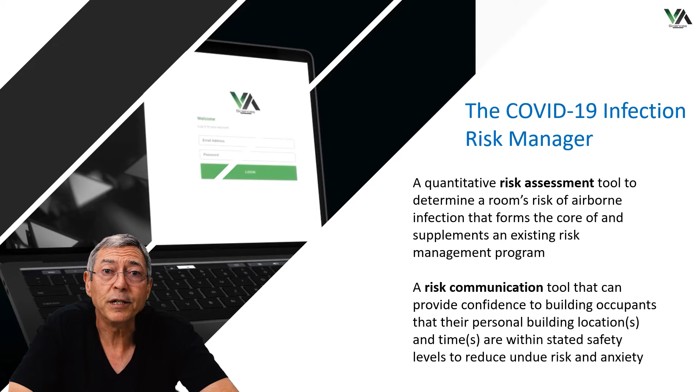Our calculator starts with the problem of reoccupying buildings. So what I present today, our solution, was designed with both scientific principles and risk communication principles in mind, to be used by both scientists and the general public. It is therefore both a risk assessment tool and a risk communication tool.

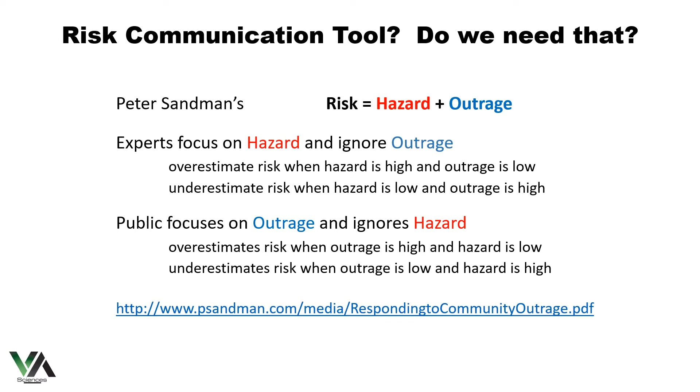Risk communication principles are well beyond the 5 minutes I have today, but consider Dr. Peter Sandman's excellent model, risk equals hazard plus outrage. Put simply, scientists focus on the hazard and ignore the outrage, while the public does the reverse. If we wish to successfully reoccupy buildings, we need to consider public perceptions.

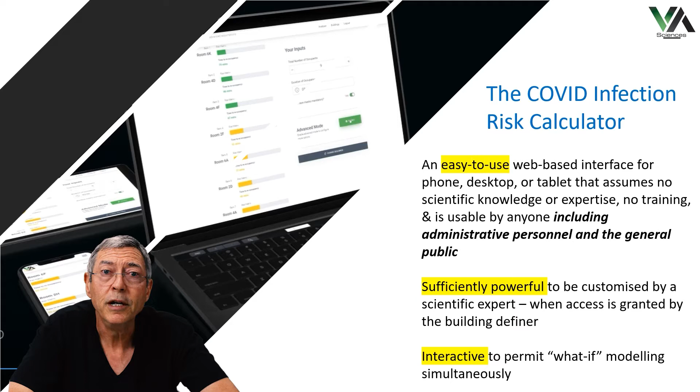The name of our calculator is the COVID Infection Risk Calculator. It's web-based and easy to use, and is usable across all our common devices, including smartphones. With several access levels, a sophisticated user can also create customized templates for others. It's interactive. Input parameters can be changed, and the results seen immediately on the screen.

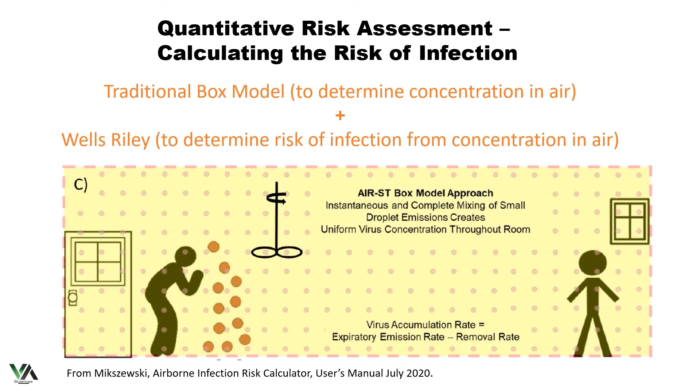It uses the same approach as many others you'll hear about today: the compartment model to determine quanta concentration in air, and then the Wells-Riley to calculate infection risk. It does have some unique features, however, including the ability to compare results across multiple rooms simultaneously in the Compare Rooms mode, and the ability to simulate an individual accessing multiple rooms in multiple buildings or spaces, and then calculating an overall risk, such as what might occur during a visit to an airport or shopping center where you pass through a number of spaces.

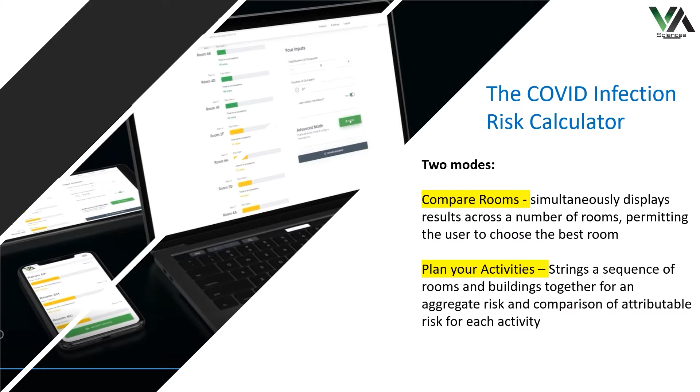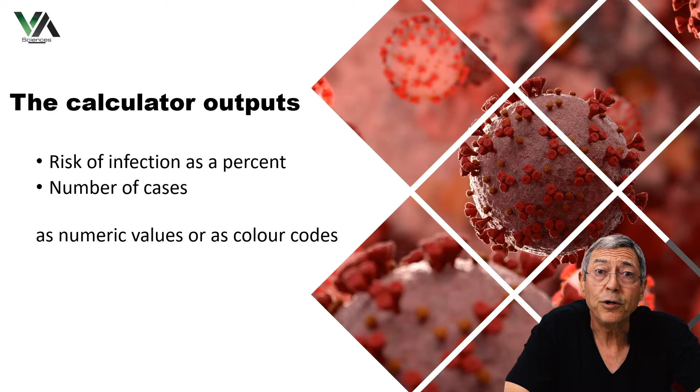It considers building factors, activity factors, and some virus-specific factors, as shown. The output can be controlled as either a simple color code or with more specific infection risk estimates. Let's get started. The solution: a quantitative risk assessment tool that uses the size of the room, the airflow, the occupant activities, and what scientists know about SARS-CoV-2 virus, allowing people to safely reoccupy buildings in a timely manner during the COVID-19 pandemic.

Using the latest algorithms, this tool is powerful enough to provide a scientific estimate of the risk of infection, yet simple enough to be placed in the hands of a building occupant to allow them to understand and manage their risk, reduce their anxiety, and provide the confidence needed to reoccupy their building. In short, this is a risk assessment tool, but also, and most importantly, it's a risk communication and management solution.

A user begins by choosing the number of occupants and the duration spent in the selected building, and immediately sees the risk of infection for all the rooms in ascending order, with the room with the least risk on top. As the number of persons increases, and the time increases, the risk increases, and the changes are shown in real time.

The easy-to-interpret coloured scale bars move from green to yellow to red to indicate the risk. Are masks being used? Toggle the switch to see how this parameter affects the risk level, allowing you and your team to assess and mitigate risk prior to using a space.

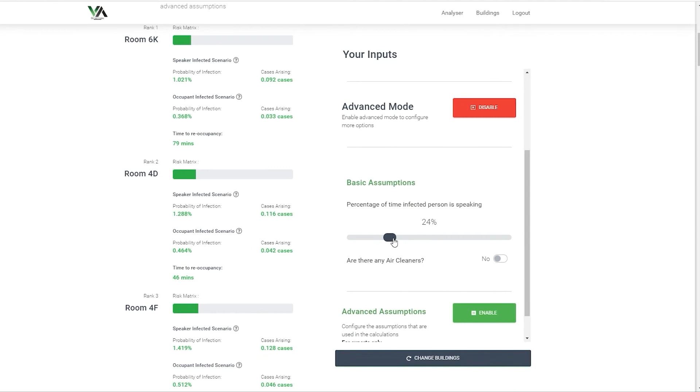Advanced users, when granted access by the building definer, have the ability to modify the underlying assumptions used to calculate the risk. Are air cleaners present? How many and at what capacity?

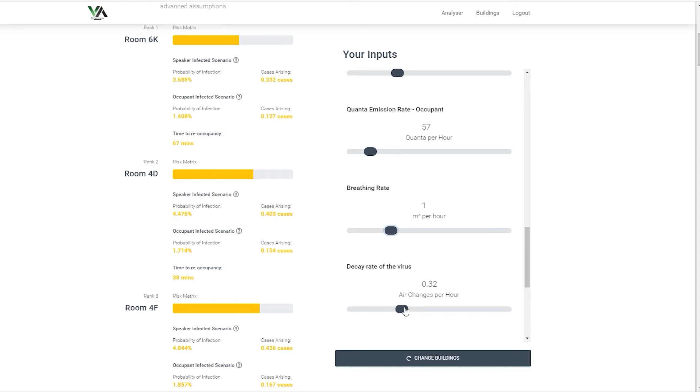Advanced users can display the calculation fields showing the exact numbers used to calculate the results. Changing the default values to reflect any unique aspects of the occupancy makes the tool useful to even the most advanced health scientists. When defining the building and its rooms, the volume and inward airflow, when known, are entered.

Default values for airflow are used when none is specified. After all the rooms are entered, the building definer chooses the bounds for the coloured bands, based on internal policies or on external guidance from public health authorities. These can be changed at any future time, based on changing guidance.

All the building data is stored for future analysis. This flexible web tool operates smoothly on all platforms, so whether you're accessing from your office, your tablet, or from your phone on the go, the data you need will always be at your fingertips.

The VA COVID Calculator is a risk management solution forming the core to your return to workplace strategy. By working with a program that runs on personal devices in real time, building occupants can return to their buildings with confidence in their safety.

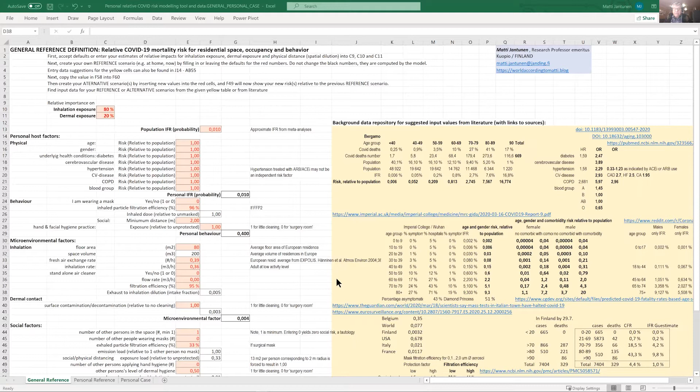This is the first sheet, the general reference sheet. Its inputs now represent European population level conditions in the summer of 2020. In the model, these data produce a reference risk of 5.05 times 10 to the minus 10. This is merely a dimensionless numerical reference that later values are compared to.

The next personal reference sheet represents my own physical, behavioral, microenvironmental, and social factors, plus the average epidemic factors in July 2020 in Finland. My age and gender increase my risk. My blood group reduces it.

My big house and low occupancy, and low national COVID incidence levels, pull the risk downwards, and the resulting personal reference risk estimate turns out to be only 6% of the general European reference risk at the same time.

The third personal case sheet keeps my own personal and microenvironmental factors unchanged, but I changed the social factors here to represent a family reunion, 10 times more people other than myself in the house, spreading viruses in the same volume of air and reducing the distances between us. And the epidemic factor now reflects a 44 times higher COVID incidence in November compared to July.

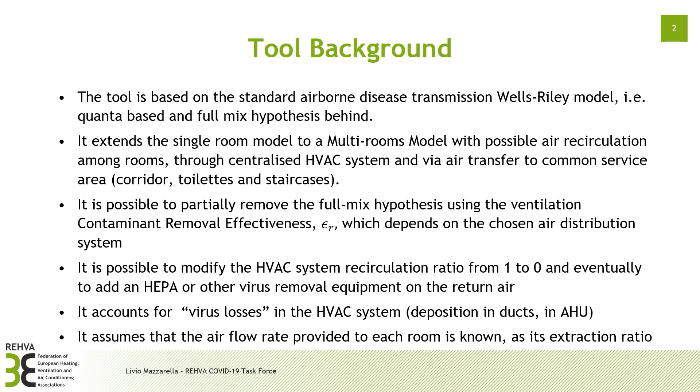Unbalanced air flows in each room can cause air exfiltration or air transfer to corridor and then toilets and staircase, if any extraction takes place there.

Virus sources can be placed in any room, corridor, staircase, and toilet with its specific strength and different time schedule organized with 2 time steps. In addition to HVAC virus filtration efficiency on return air, provided by a HEPA filter or another virus removal equipment, it accounts for facial mask usage through their efficiency, separately for infected and susceptible people.

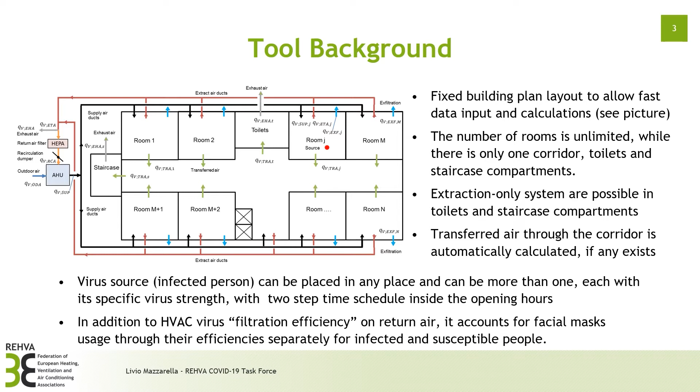In the output, it reports the average virus concentration in quanta for each space, the individual infection risk, and the average number of potentially infected people. Further, the virus air-to-surface deposition is given also for the HVAC system, other than the spaces.

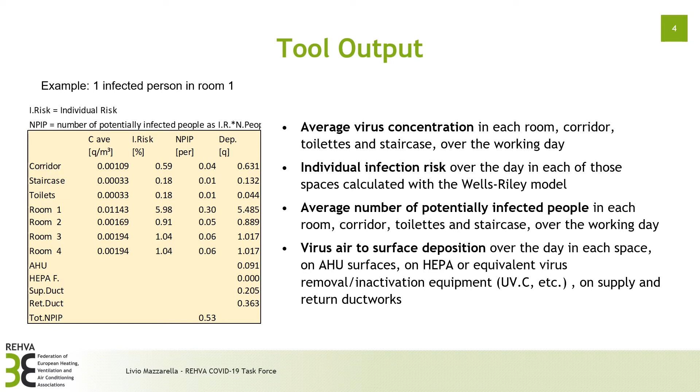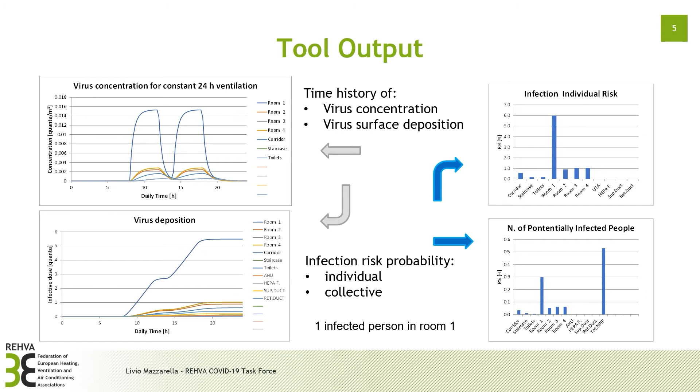Graphic output is also available, providing daily time history for both virus concentration and deposition in each space. Two histograms are available, giving the individual infection risk distribution and number of potentially infected people distribution among spaces in total for the last period. The tool is primarily to be used to perform sensitivity analysis with respect to different possible technical solutions, as shown in this example.

Here you can see how individual infection risk distribution is changing when moving from recirculation to full outdoor air on HVAC return air, just from left to right.

Also, an example of the impact of facial mask wearing is given. The histogram on the left is reporting individual infection risk at 100% recirculation when all people are wearing 50% efficiency facial masks. In the histogram on the right, HVAC recirculation is instead set to 0.

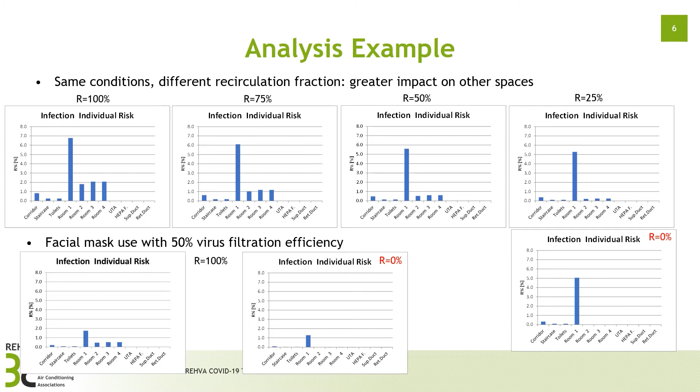Conclusions: the developed tool, with some limitations, allows comparing possible improvements on both ventilation solutions for new and under-retrofit buildings or systems, and different operation strategies for existing systems.

The tool has been developed in VBA under MS Excel and it's simple enough to use and fast to execute, but is intended to be used by experts only, who know the meaning of each input and their implication on the result. Thank you for your attention and I'm available for any question.

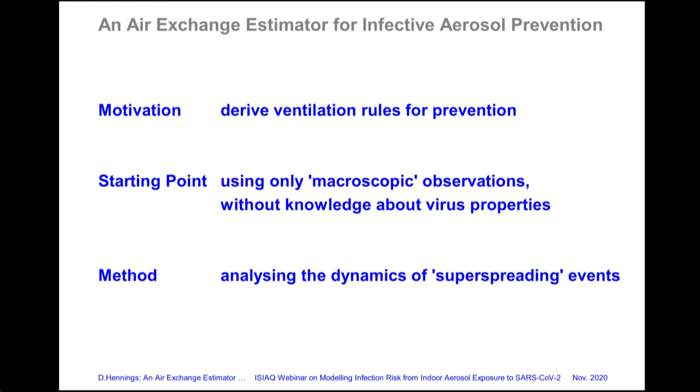The motivation is to derive ventilation rules for rooms of all sizes. I'm starting from observed events and I use no knowledge about virus properties. My method is to analyze the dynamics of events.

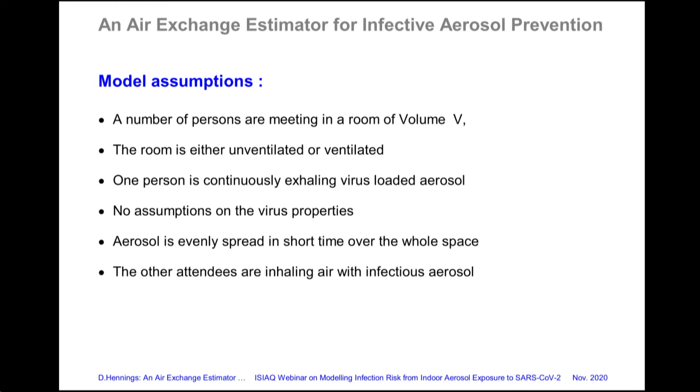Model assumptions are: a number of persons are meeting in a room. The room is either unventilated or ventilated. One person is exhaling virus-loaded aerosol. Aerosol is spread over the whole room.

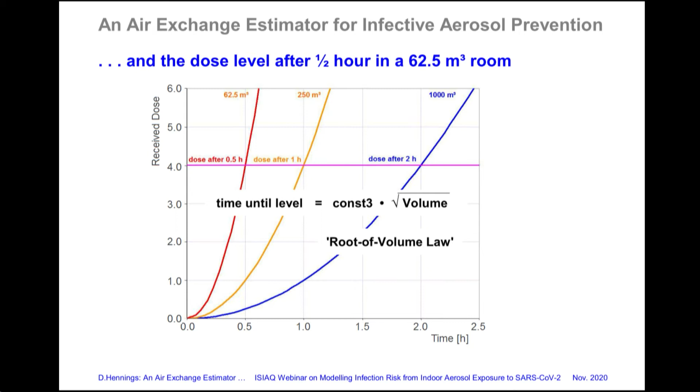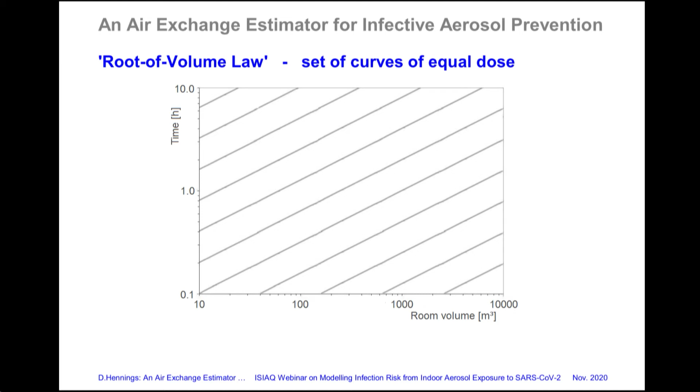A generalization leads to a root of volume law. In a graph with volume on the horizontal axis and time on the vertical axis, the root of volume law defines a set of curves of equal dose. I will come back to this type of graph.

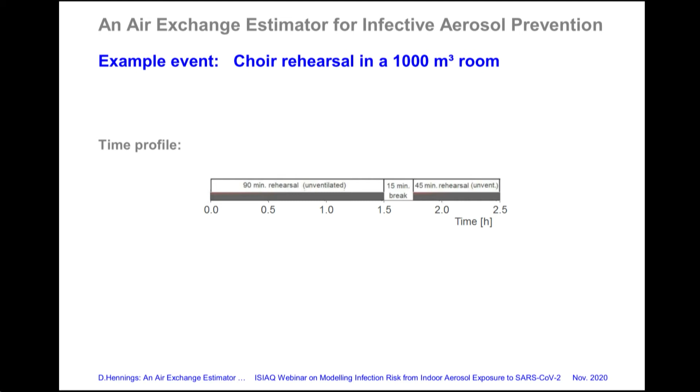Now we are looking at an example event, a choir rehearsal in a 1000 cubic meter room. The time profile is 90 minutes rehearsal work without ventilation, followed by a 15-minute break, and finally another 45 minutes without ventilation. The intensity of ventilation during the break is not known.

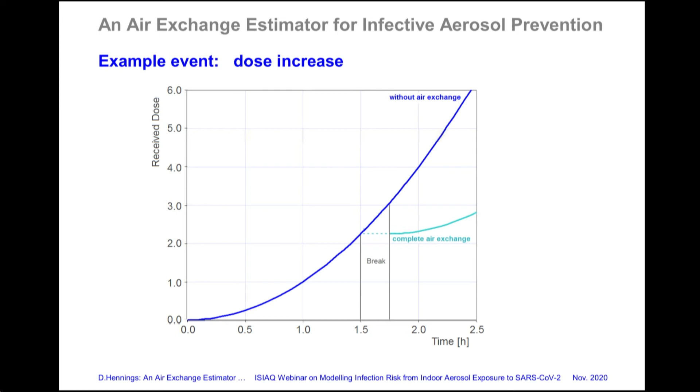Looking at the dose, in the no ventilation case, the dose shows more increase in the final 45 minutes than in the initial 90 minutes. In the complete air exchange case, the dose shows a minor increase in the final 45 minutes, but on top of the dose already reached in the first 90 minutes.

For comparison of unventilated and ventilated cases, the ventilated curves can be projected to the corresponding unventilated curves.

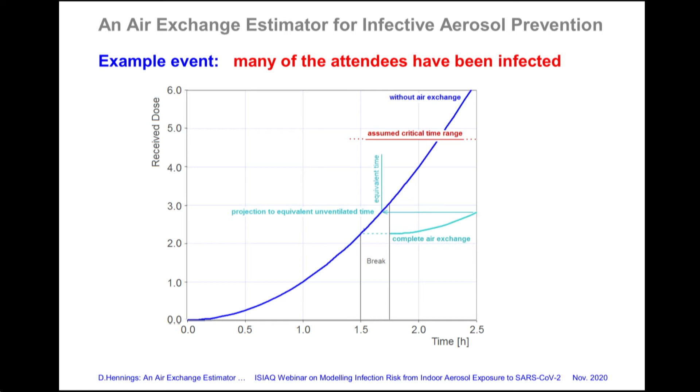In the example event, many of the attendees have been infected, but not all. This leads to the assumption that at some critical time in the later part of the rehearsal, a critical dose has been exceeded. Now we can draw the event with its room volume and the critical time assumption as a point with some error bars into the equal dose graph.

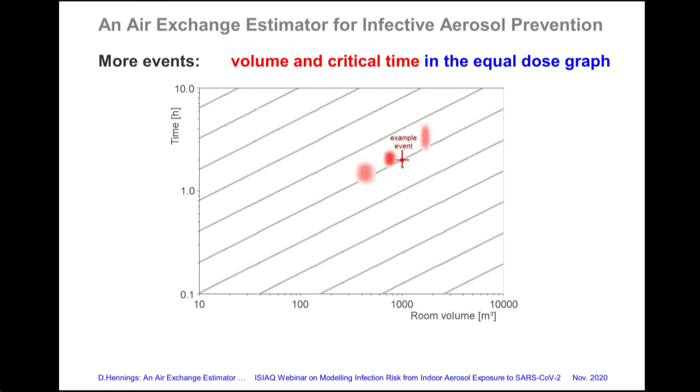Applying a similar procedure to other events gives more points with error bars or error clouds. Now a lower limiting equidose line can be drawn below all events. The range above this line can be hazardous and should be avoided in all events where people are meeting.

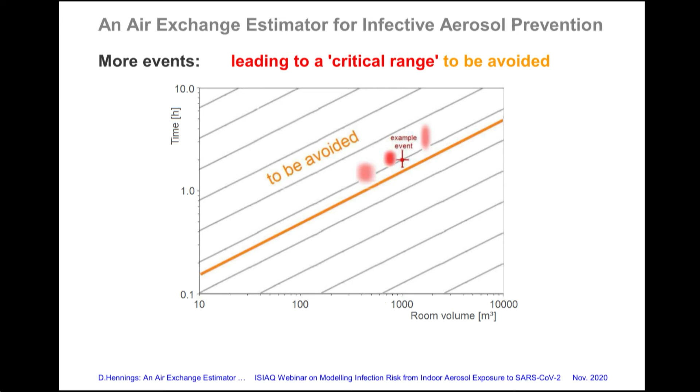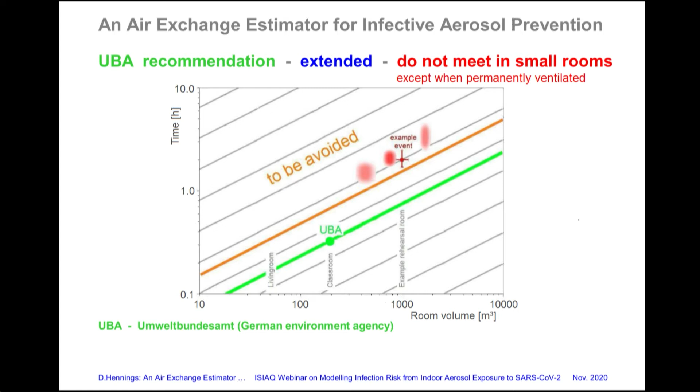The extension to smaller rooms shows a requirement for almost permanent air exchange when used for meetings. Lacking awareness of this risk may cause a huge number of aerosol-induced infections in small rooms. That's it. Thank you.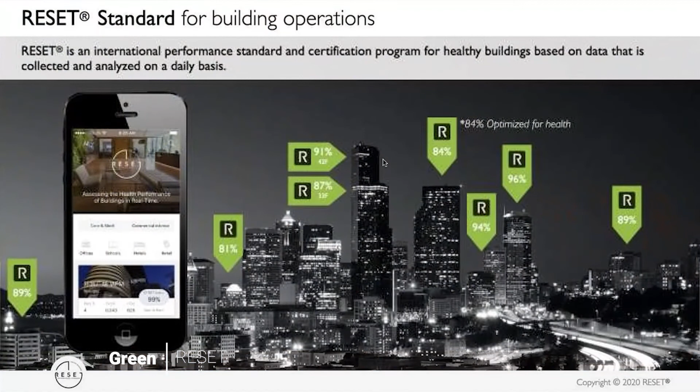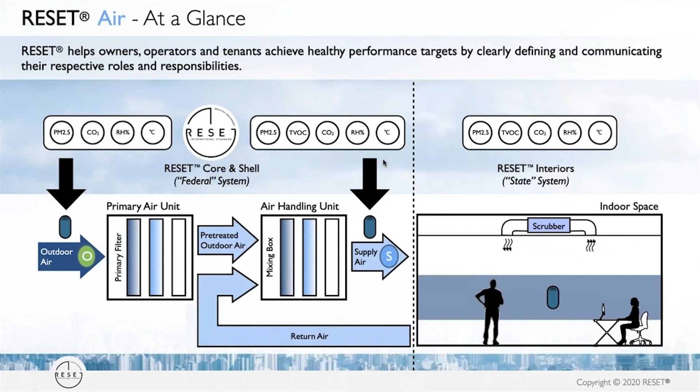Thank you for joining us for a very brief presentation of the RESET Index. For those who aren't familiar with RESET, it is a standard for measuring the performance of indoor spaces in continuous time with respect to air quality. The standard requires monitors within mechanical systems for building owners and within indoor spaces for tenants. The standard is used around the world across a variety of project types.

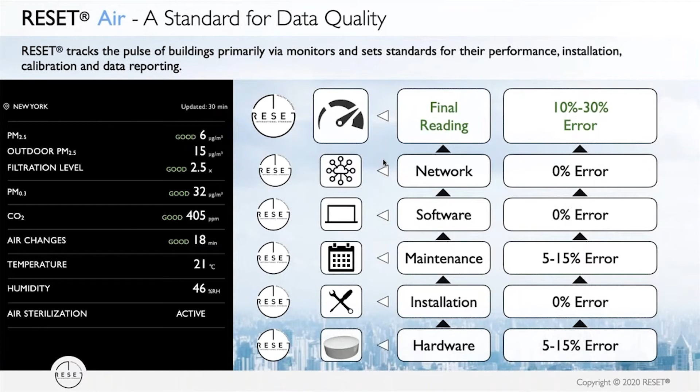At the core of RESET is a standard for data, where we look at the elements that affect data quality, primarily monitor accuracy, location of installation, and maintenance.

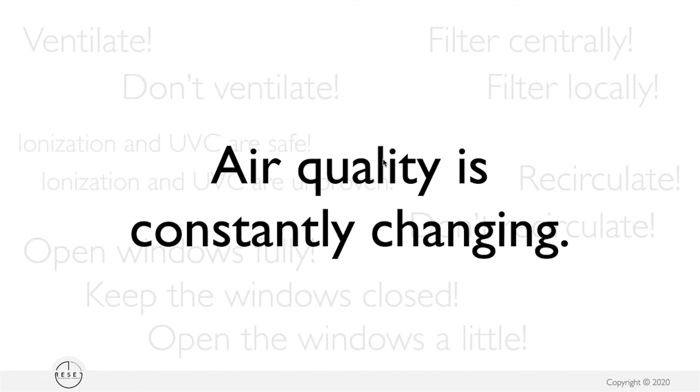Now, onto the topic of the moment, estimating and controlling transmission from aerosols. Let's first acknowledge that the range of advice surrounding this topic is highly confusing and often contradictory. All of it is right, and all of it is wrong. Why? Because air quality is constantly changing and needs differ from situation to situation.

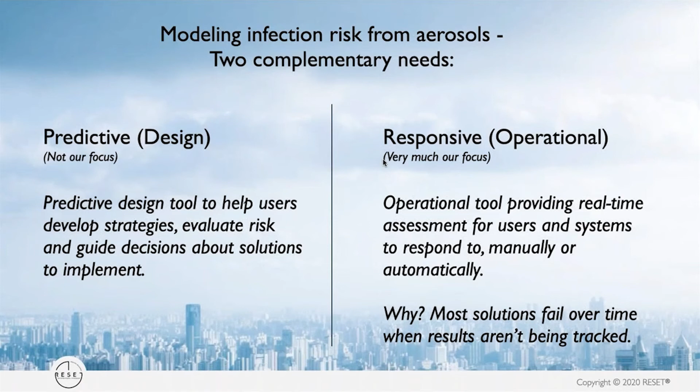As a result, a complete approach to modeling infection risk from aerosols needs two complementary parts, a predictive design tool and a responsive operational tool, with the latter being our focus. In order to achieve this, our approach has been to use scientific literature that can be applied to operational building science and map each variable to sensor data, yielding a standardized real-time score.

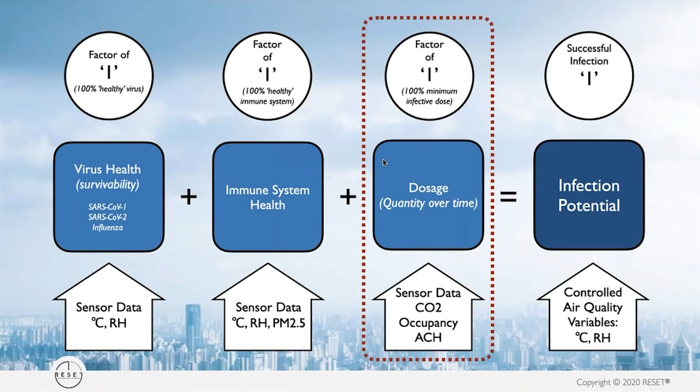More specifically, our approach has broken infection potential into virus health, immune system health, and dosage. To serve as an example, we'll use virus survivability and immune system health as variables, while keeping dosage constant and expressed as a factor of 1.

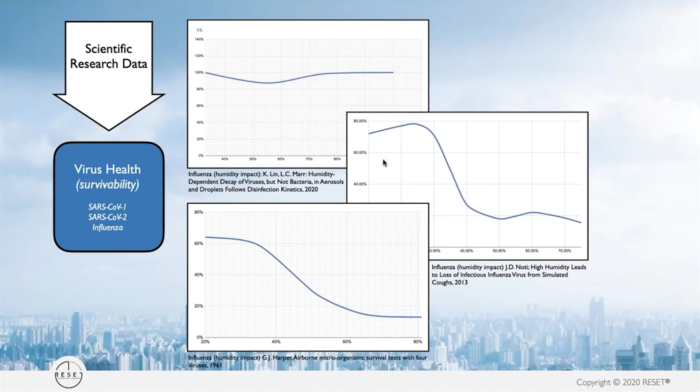The following slide shows the impact of humidity on the survival of the influenza virus from 3 well-known cornerstone studies. As we can see, their conclusions are all quite different. Overlaying the results yields the following graph with an average 28.8% uncertainty.

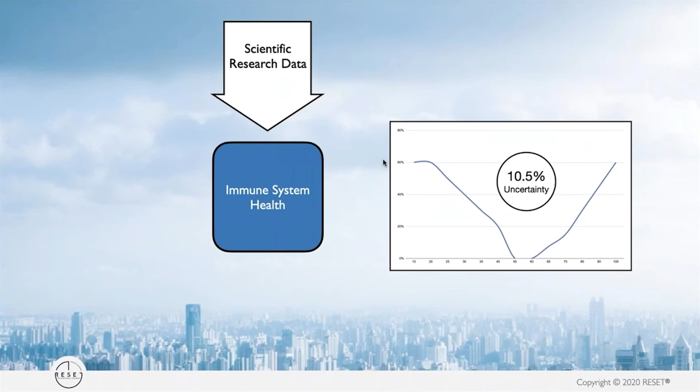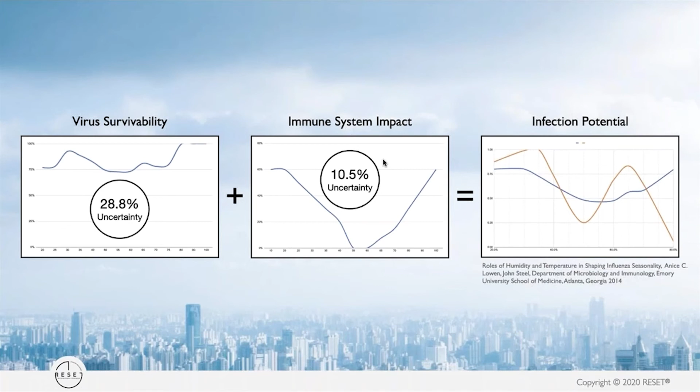Repeating the same exercise for the impact of humidity on the human immune system yields the following result. In turn, overlaying these two results gives us the following estimated infection potential, which we then overlay with research on actual infection rates from another cornerstone study. The final result shows that the trends track closely, with a key difference being the acuteness of the peaks and troughs.

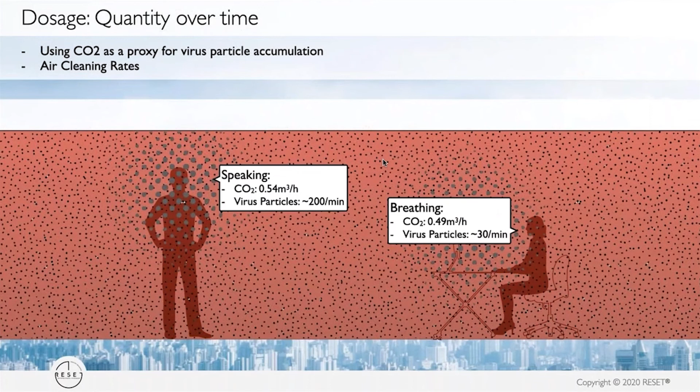Now, turning our attention back to dosage for a moment, this variable is most commonly tracked by using CO2 as a proxy for virus particles being emitted. In this way, basic data from RESET accredited sensors deployed using a standardized method can be used to model 3 complementary indices.

The Building Optimization Index considers the optimization of building systems in real time. The aerosol infection potential is slightly different in that several of the parameters are computed on a rolling average, seeing as their health impact comes from exposure over time. The Certainty Index follows the RESET ethos of transparency in the accuracy of data being communicated.

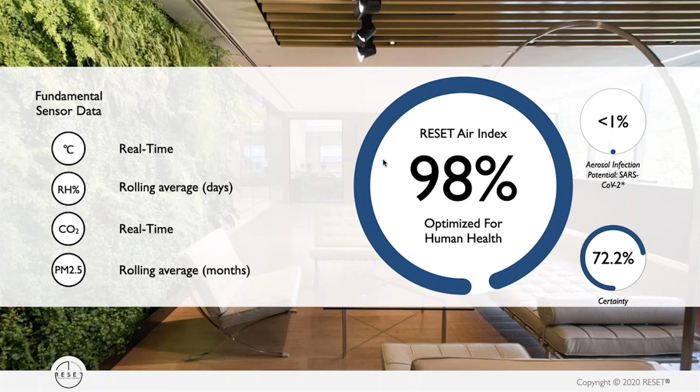Of course, real-time modeling becomes a whole lot more interesting when more real-time data is available, particularly as it relates to filtration, air cleaning rates, and particle size.

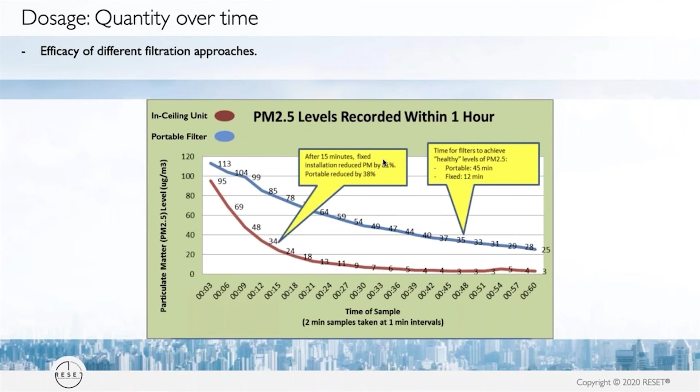Data such as fan speed and density and size of liquid aerosolized particles allow users to decouple CO2 data from calculations of risk. This further allows users to actually measure the efficacy of different filtration approaches, such as portables versus ceiling-mounted solutions. This is especially important as a maintenance tool over time, enabled with notifications when the certainty of human error starts to slip in.

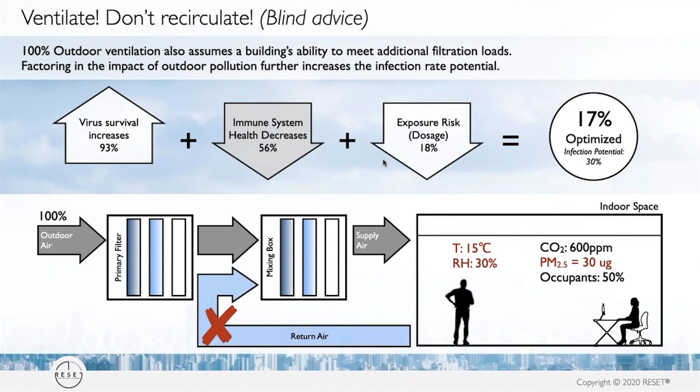Using the data for predictive purposes, in this case study, the operator notes that infection potential only approaches 0 when CO2 approaches 400 ppm, particles approach 0, and the air is heated and humidified to human comfort zone, necessitating enormous amounts of energy. This doesn't need to be the case.

When working with data and empowering building systems to assess and respond in real time, we find that a blend of ventilation with central and hyperlocal filtration enables users to drive infection potential from aerosols down to an absolute minimum while keeping energy costs low.

But the most important realization in working with real-time assessments is that air quality is ever-changing and that the blend of ventilation and filtration needs to as well. Ignoring this reality will require the industry to oversize systems and burn through a lot more energy to meet results.

As a reminder, RESET is an international third-party standard. We don't make or sell solutions, rather, we work with solution providers and building operators who wish to stay on the leading edge of the industry in terms of data quality and actionability. Thank you.

The Indoor Scenario Simulator is a tool to estimate the indoor viral exposure and dose. We always exhale aerosols, little when being quiet, more when talking, even more when being loud. These droplets consist of body liquids and can contain viruses.

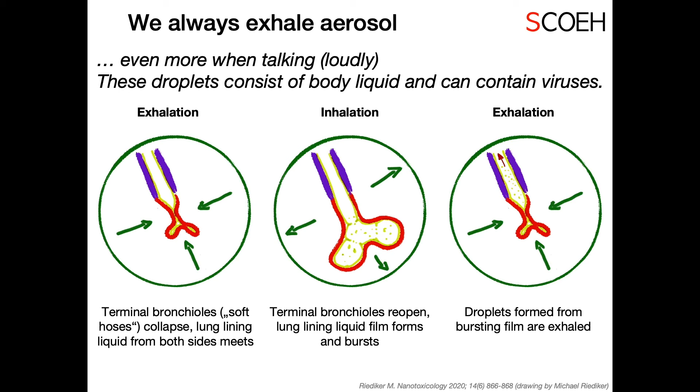Now, how much virus is emitted depends not only on the amount of aerosols, but also on the viral load of the individual. So we wondered, what is the distribution of the virus emissions in the general population? For this, we did a Monte Carlo simulation.

We took the variability of viral load in the population and combined it with the size distribution and the variability of aerosol emissions. We addressed sedimentation in turbulent air and addressed the differences between being quiet, soft voice, and loud voice. We realized there is a very wide range of emissions.

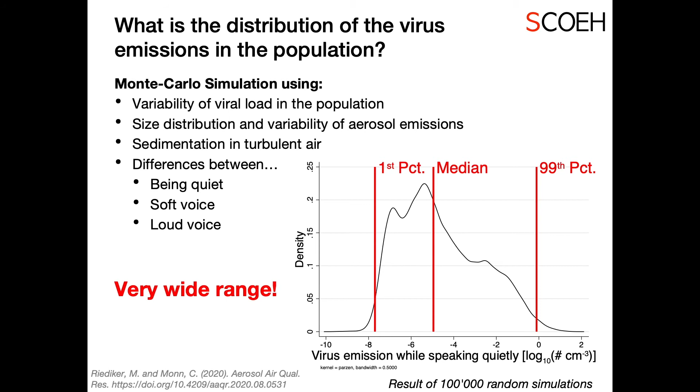The graph here shows you the virus emissions while speaking quietly. It's the result of 100,000 random simulations, and you can tell that the viral emission ranges over 10 orders of magnitude. We now took this source strength and fed it into a well-mixed room model.

This well-mixed room model is a standard occupational hygiene model that applies mass balance for far and near field. We used a virus-emitting person as the source, and we addressed the reduction by ventilation and half-life of the virus.

The user can also modify the emitter, like mask efficiency, the activity, the voice strength. He can change the receiver, such as mask efficiency, and again look at different activity. And we can also modify the room parameters.

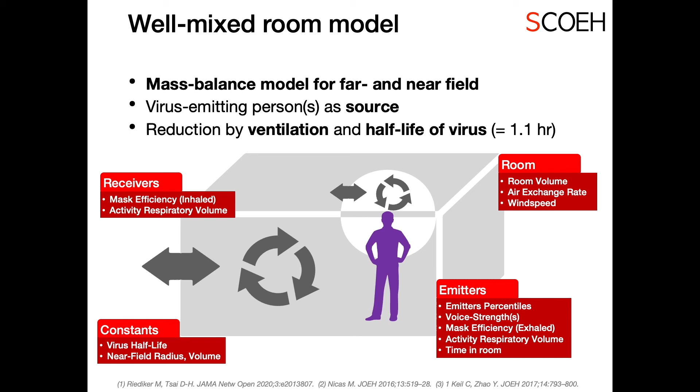All of this is implemented as a spreadsheet tool. 4 languages are already complete, more are in progress. The tool has blue fields that the user can change and yellow fields where the user gets feedback. There is a second background sheet that contains the different constants, the different equations, and makes it quite transparent what's going on.

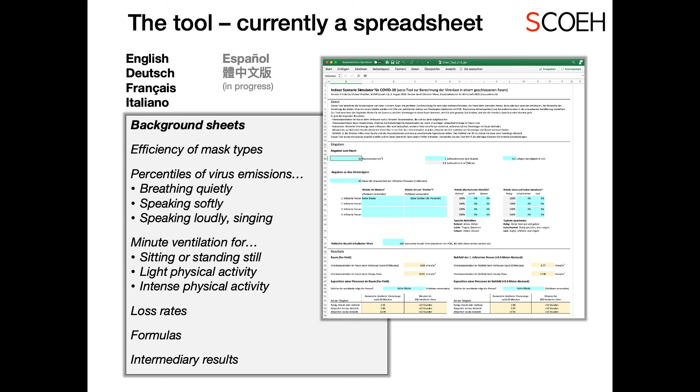The tool provides an exposure dose, and this is intentional. We understand the dose-response curve is subject to research, especially the dose-response relationship at low virus exposures is ongoing research. It may change over time. In addition, you have to change your risk appraisal depending on whether you are doing it for healthy or at-risk populations.

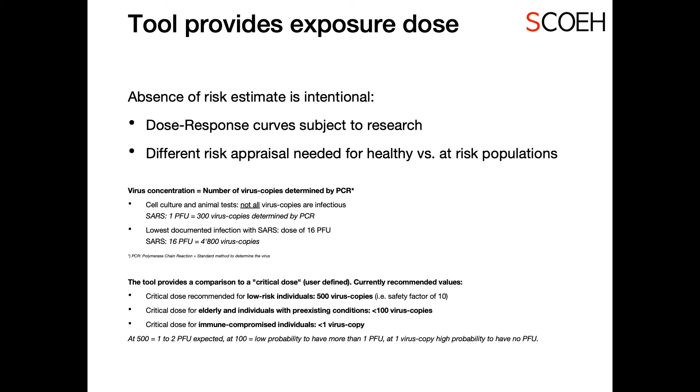When we do a sensitivity analysis of our model, we realize that the emitter strength is by far the most important factor. Speaking mode is also relevant, very relevant, depending on how much somebody speaks loudly. Mask efficiency can make a very big difference.

Ventilation rate is typically only a modifier, but not sufficient in many cases to make an unsatisfactory situation into a satisfactory one. And room size is one that you need to go to very large room sizes before it really makes a difference. To explain the importance of the emitter strength, we came up with this battlefield game analogy.

We basically say you are a battlefield player and you have the task to define the optimal defense strategy. We present different players that are present in the way that we see the infection risk from these people in our model.

So there are these paintball kids where you have many of them, but they don't really manage to hit you unless they have direct intimate contact with you. While on the other end of this scale, there's this special ops guy, this Rambo, that manages to very quickly infect many people, be it in large rooms or being very briefly together with you.

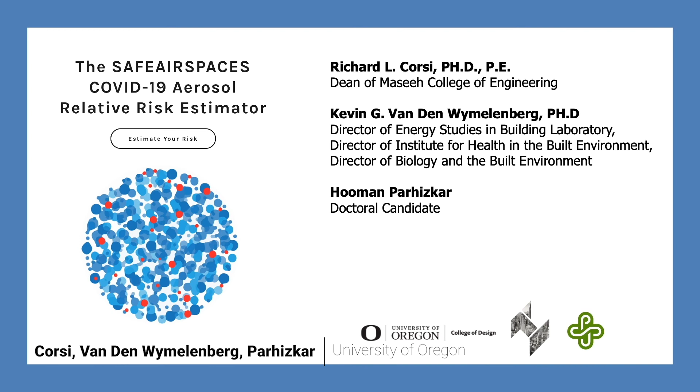The Safe Air Spaces Aerosol Transmission Risk Estimator was developed in collaboration between Dr. Richard Corsi, Dr. Kevin Van Den Wymelenberg, and Hooman Parhizkar.

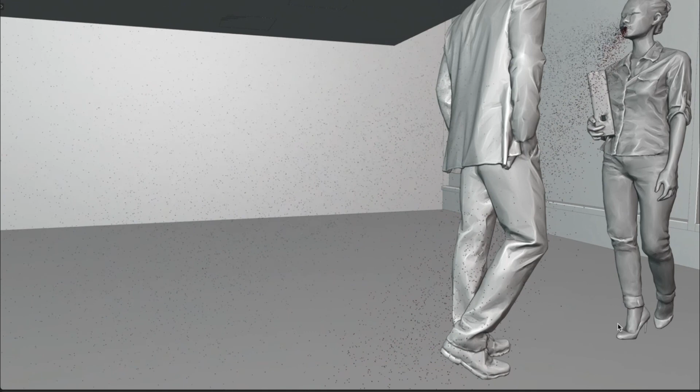Each person emits particles in a wide range of sizes, from large droplets to ultrafine particles. Large droplets fall quickly out of the air, while some fine particles can remain as aerosols and float in the air for hours. The Safe Air Spaces tool focuses on fine particles, those smaller than 5 microns, which are likely to remain in the air for long durations. The tool does not account for transmission risk from large droplets or direct contact.

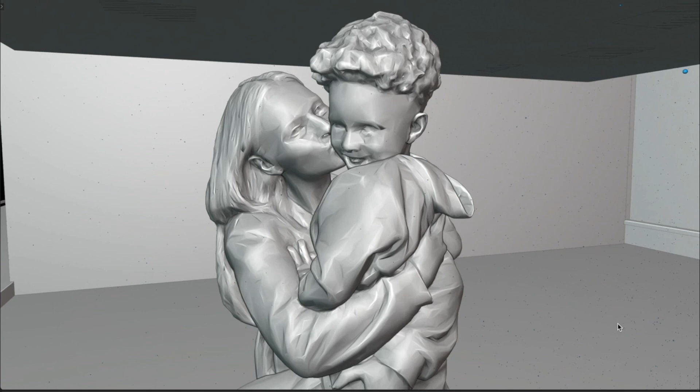If an individual has a viral infection, the aerosol particles that are expelled may contain SARS-CoV-2 virions, or viral particles, and some portion of these virions may be viable or infectious. We felt there was a need for a simple-to-use but mechanistic approach to estimating aerosol transmission risk.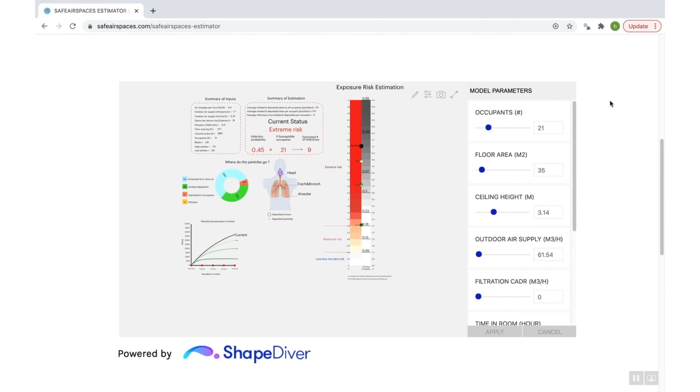The tool is freely available at safeairspaces.com. Enter by clicking Estimate Your Risk, read and acknowledge the terms and conditions to see the interface. We partnered with Shapediver to access their software solution in the AWS cloud. Key inputs, including the number of occupants, floor area, and ceiling height, can be input at the right.

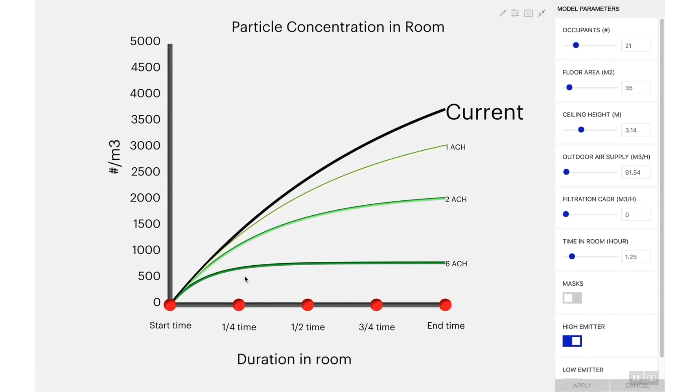The tool begins by estimating the number of particles in a space over time with several different air exchange rates plotted. Assumptions are made about emissions from an infected individual, and these are simplified as either a high emitter or low emitter, where the low emitter is assumed to have no symptoms such as coughing.

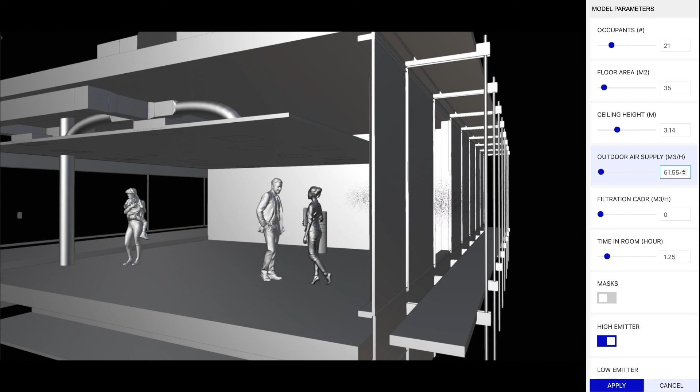Particles are removed with increased air exchanges. For example, if windows are opened, increased airflow can remove particles from a space through a window. Similarly, if mechanical ventilation rates are increased, particles can be removed through exhaust air and through filtration.

Not all rooms can increase airflow through windows or mechanical ventilation. Some spaces may need to explore the use of in-room air cleaners. This can be input as a clean air delivery rate under the filtration tab.

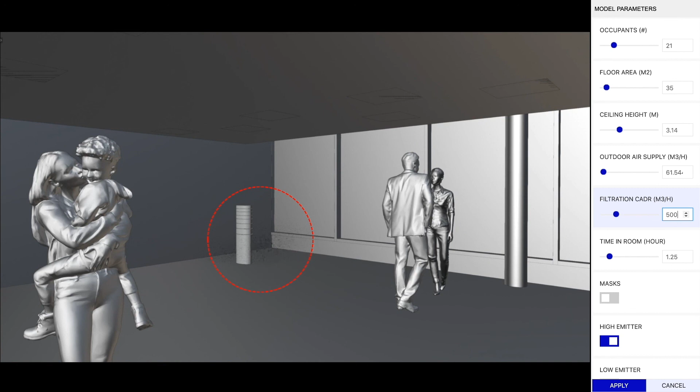Getting particle physics right is one thing, but calculating risk is another matter. We use the Guangzhou restaurant outbreak as a way to calibrate the risk estimation tool. The base inputs are for this outbreak. There was approximately 45% attack rate at this dining event, which has been well characterized.

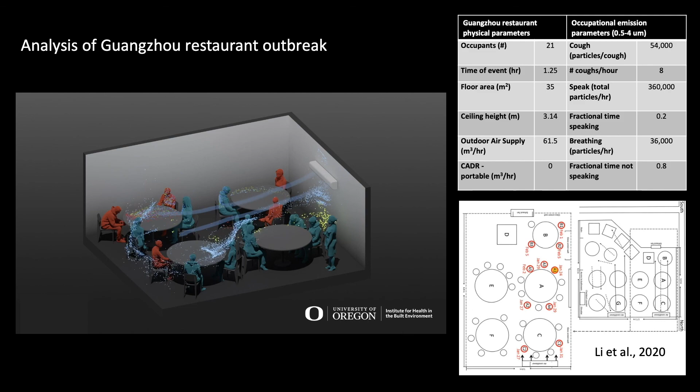First, the estimated particles in the space are calculated through a series of mass balance equations, as previously noted. Next, we estimate the volume of inhaled and deposited particles to other individuals within the room, or the dose deposited into each person's respiratory system.

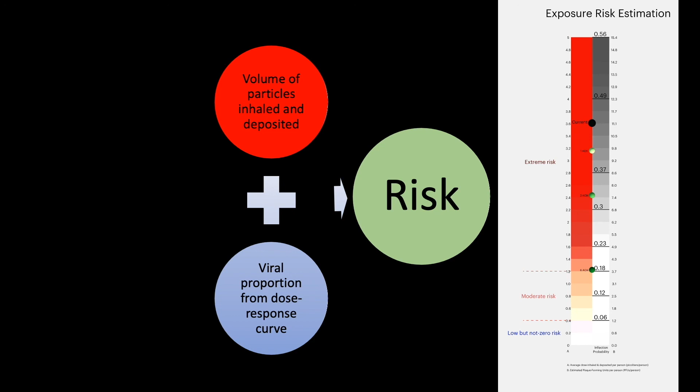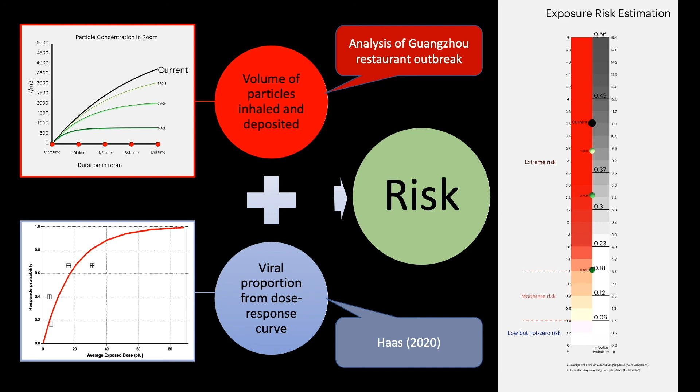From there, it is necessary to estimate the relationship between that dose and the likelihood of an infection, or the dose-response relationship. For this, we relied on previous dose-response research of a different coronavirus, as discussed by Dr. Haas. You can see the vertical exposure scale to the far right that there are two sets of numbers. On the left axis is the deposited particle volume per person, and on the right axis is the estimated number of viable virions, or the estimated viral dose based upon the previous dose response curve.

There are some other interesting details, such as these two figures showing the particle fate location. The donut plot shows the general location of each particle at the end of the event duration. The human figure at the right shows the location of all particles within the human respiratory system in blue, and the estimated number of virions or viral particles in red.

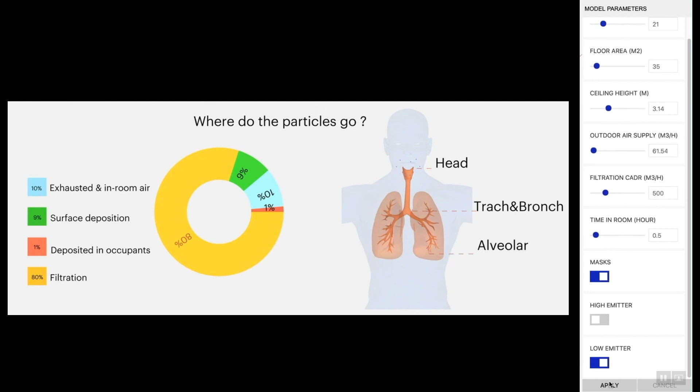Note that each time you make a change to the inputs at the right, you must hit the apply button for that result to take effect. Here you can see we show particle reduction for the use of masks, and here the reduction from increased filtration, and finally the reduction from time and number of individuals within the room.

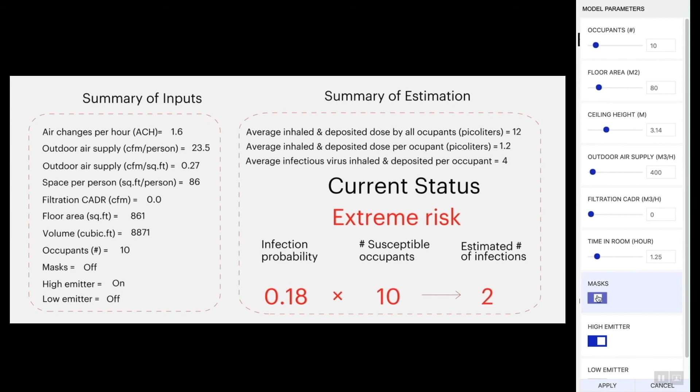We're currently working on updates to include a near-field multiplier, the role of humidification, and multi-zone analyses. Thanks for checking out Safe Air Spaces. Remember, wear a mask and be air aware.